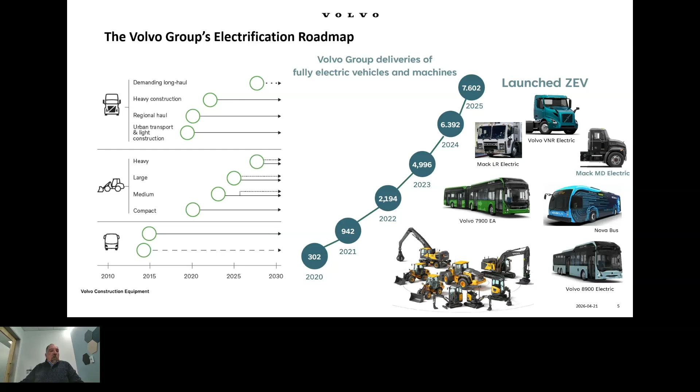So the next question is really what is driving this drive towards more sustainable solutions and more sustainable practices in our industry. I look at four different trends that are driving this forward.

So political trends definitely are part of it. They are moving us forward. What the government and the society wants us to do in terms of sustainability is usually defined through the regulations, the laws coming out of our politicians, coming out of our governments.

But there are other trends affecting this as well. We are seeing a rapid move to urbanization around the world, basically the phenomenon of people moving out of rural areas and into heavily populated areas, or cities. We are seeing a lot of movement in technology over the last few years, not only in the innovations coming out in technology, but in the pace of technology changes and adoption rapidly accelerating.

And we are also seeing a difference in the energy outlook around the world. Different types of energy are being phased out, and different types of energy generation are being brought in. But certainly the demand for energy, if you look at data warehouses and AI, is going up exponentially as we speak.

So if we take a deeper dive into these, political and social uncertainty definitely is a driver in the last few years. We're seeing right now some different tariff regimes imposed on us. We're seeing a war in the Middle East, or a conflict in the Middle East. All those things are drastically affecting our political situation and the geopolitical situation worldwide.

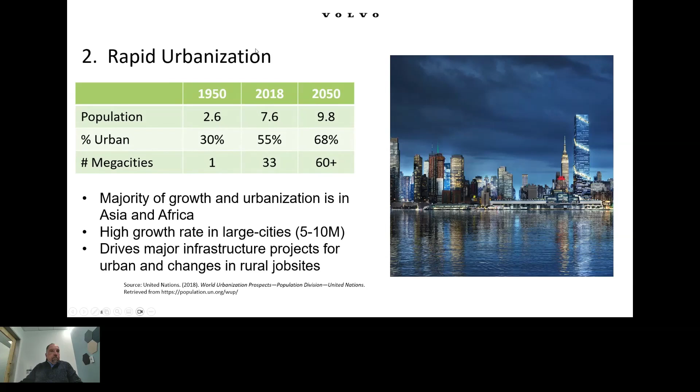Technology continues to change and advances in cyclical waves, but more rapidly as time goes on, so the pace of technology continues to accelerate. The newest technologies we're looking at are AI and data driven. We're still in the middle of the information age, and we consider these to be the next technologies that'll be dominant for the next 20 or 30 years. But we're already starting to look at what comes after that, and we don't know what that is. It could be biotechnologies, nanotechnologies, or a number of different technologies. But we're pretty sure, looking at history and technology development over time, that a new set of technologies will emerge in about 20 or 30 years and become dominant.

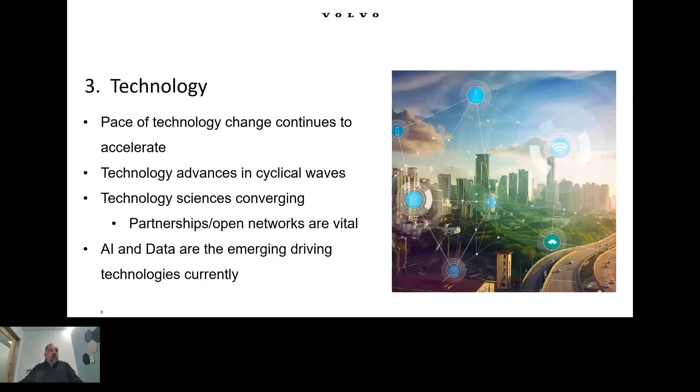So what that means essentially is energy availability and cost is a very, very good correlation to global GDP. In fact, it's the best correlation we have, better than interest rates, better than currencies, better than any other factor in economics. But it has changed over time. What happened in 1973 is we had the OPEC oil crisis, and we learned to be much more efficient with our energy usage. So for every unit of energy since the 1970s, we've been producing more GDP growth, which is good news. That's what we should be doing, getting more and more efficient over time.

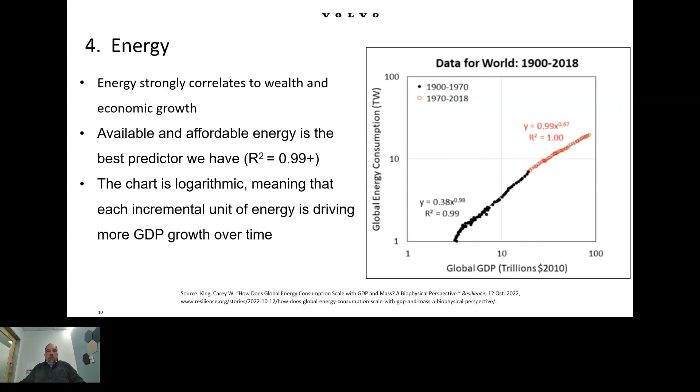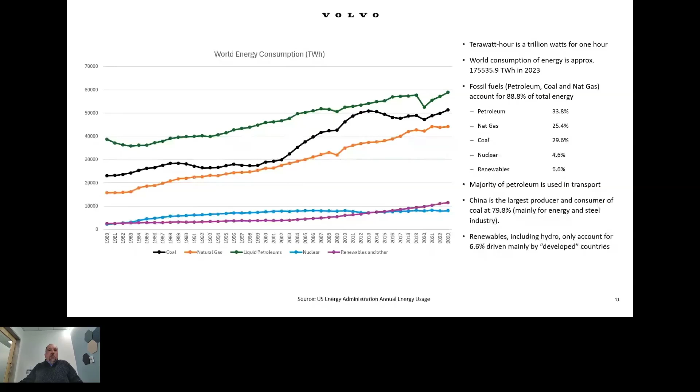The problem is that some of those nuclear plants are now coming offline, so we're actually seeing a decline in nuclear, and utilities are starting to scramble to try to bring some of them back online or replace them with new nuclear generation. Because we're at the same situation we're seeing worldwide: you cannot at the moment replace all the petroleum or fossil fuels with electricity. It's just not feasible to try to do that quickly in one step.

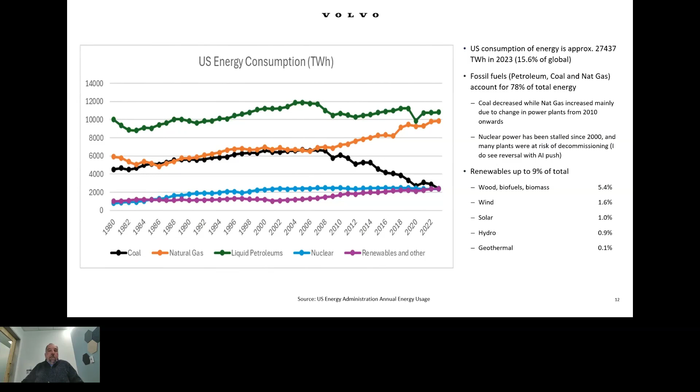Where the energy comes from does make a big difference. So if you look at a machine - bringing it right back down to the machine level - a diesel run machine with an internal combustion engine, if I wanted to generate about 5,000 kilowatt hours out of that machine, that's about enough to power an average house for about half a year. So it's a fair amount of energy.

I consume somewhere around 622 gallons of diesel. If I know that a gallon of diesel consumption produces about 10.19 kilograms of CO2 equivalents, that gives me a total of about 6,335 kilograms of CO2. That's running a machine to produce 5,000 kilowatt hours of energy or work, if you want to think about it that way.

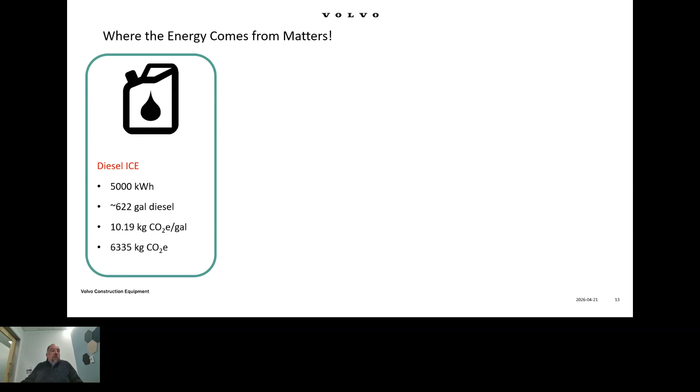That same 5,000 kilowatt hours, if I was to produce it out of hydro generation - hydro generation is not 100% clean, there is some embedded carbon in our hydro generation as well, but it's far, far less, about 99% less than burning diesel. So if I can plug in my machine and run off hydro generated electricity, I'm getting about 99% less carbon, about 55 kilograms compared to 6,335. Big step forward. But most of our electricity is not hydro generated.

As I said earlier, only 9% of our total grid is supplied by renewable sources. So there are very few people who actually have access to 100% hydro generated electricity.

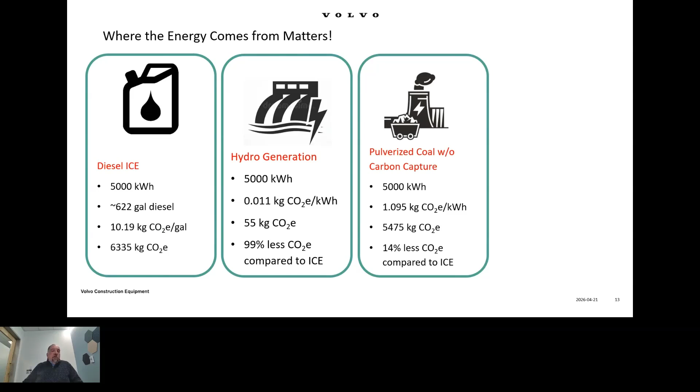So what if we look at coal? Pulverized coal without carbon capture, we're only looking at 14% less CO2 than burning diesel. So actually, if you're plugging in and taking from a coal-fired plant that doesn't have a good carbon capture system for electricity generation, you're not gaining anywhere near as much as you thought. Even though the machine may be zero emission or very low emission, the coal is producing a lot of emissions at the power plant.

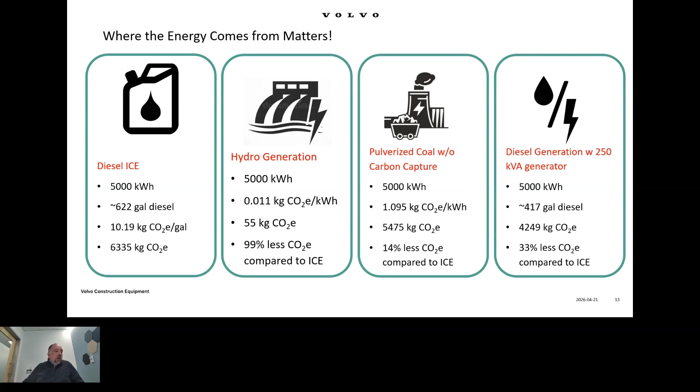And finally, I quite often get asked, okay, what if I charge my machine with a diesel generator because I don't have access to the grid? A lot of people think we're not gaining anything. The actual reality is that you're gaining about a third less CO2 than burning diesel directly in your machine. So even that is a significant step forward if you're looking at where the carbon is coming from in the carbon cycle.

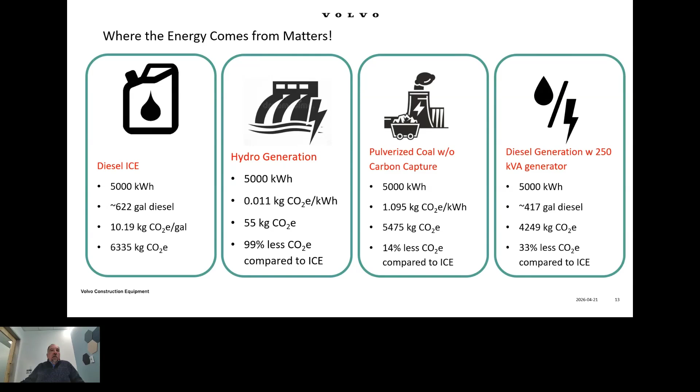So let's drill down and take a look at an example sample that we did - a real world example. But first, I want to step back and say: if we're going to look at machines and how we make a difference, it's not machine by machine. We have to look at how we get a site to be sustainable. There are two reasons for that. One is that electrifying one machine only makes a limited amount of difference versus electrifying a site with many machines on it.

And secondly, if you're going to run the infrastructure to electrify machines on a site, you don't want just one machine plugging into an infrastructure and having to run a full diesel infrastructure as well. So you want to make the transition and have as much of your site transferred over as you possibly can.

So we look at this in three steps. One, what is the machine technology that we're going to need to achieve sustainable sites? Two, what is the system that you need? In other words, how do you recharge or refuel your machines and your trucks and your conveyors and everything else running on site? And three, how do we run that whole system more energy efficient?

Because going right back to the grid, the same dynamics happen on a site. If you can get your energy consumption down, your costs, your economics are much, much better on a site.

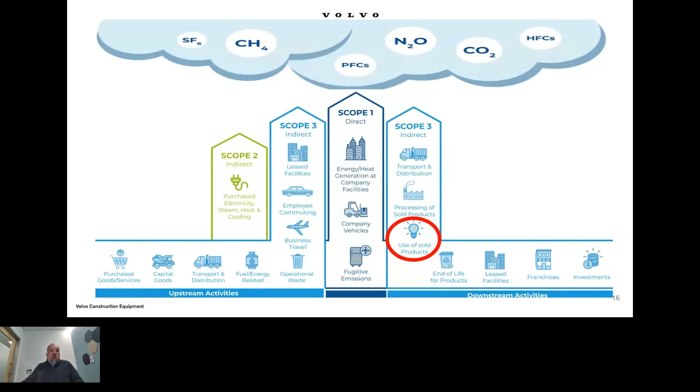So if we look at the CO2 production on a site, in our case, most of our CO2 production comes out of burning the fuel on site. If you look at our heavy equipment, an A45 for example, a 45-ton articulated hauler, 94% of the emissions come from the machine, or the carbon comes from the machine after it leaves the factory. Only 6% is embedded in the machine throughout the build process - the energy consumed in building it, all those factors are only 6%.

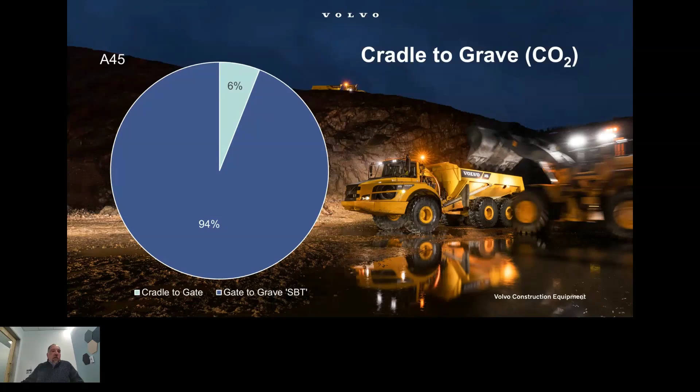So obviously, if we have a target to get 30% of the carbon out or 50% of the carbon out, whatever the individual targets are, we have to attack that 94% in the machine cases. And we do that by looking at three different technologies and bringing them together to try to make the best use of them we can.

So the technologies coming up of digitization and AI - if we understand the sites, we have good data from the sites, if we use AI wisely, we can make sites that are much more efficient from an energy point of view, from a time point of view, from a production point of view, and get those costs down and the fuel burn down and get to a less carbon intensive site.

We can also look at the sustainable power technology. So how can we power our machines to get that 94% of fuel burn down considerably and get the carbon from that eliminated? And finally, we can look at automation.

A lot of people challenge us on that and say that well, if you're automating sites, you're taking away jobs from operators. In our case, we're having a big shortage of skilled operators already. We can't get enough operators to do the work that we're asked to do. And most of these automation systems actually go into helping the operator do a better job or getting him out of dangerous situations.

So when I talk about automation, don't just automatically assume we're eliminating the operator. In most cases, it's actually helping the operator or getting him out of what we call the 3Ds - dirty, dangerous, or dull jobs - and getting machines to do them or robots to do them automatically.

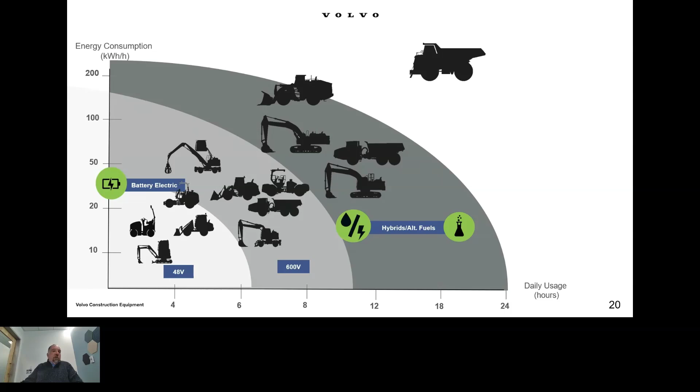If we get above about 150 kilowatt hours per hour, and we get to long duty cycles, 10, 12 hour to 24-hour duty cycles, we pretty well have to look at other solutions. Batteries become too expensive, too heavy, and too long a charge cycle for heavy equipment. So we go to hybrids or alternate fuels in those classes. For very large machines, you can do a fuel cell or alternate fuel ICE systems. In mid-size and larger machines, if the application is right, you can power them directly from the grid if it's a relatively stationary application—you plug in your machine and it operates from grid power continually.

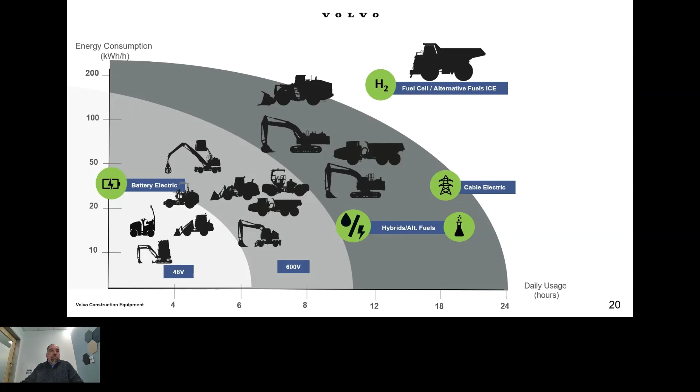So our sustainable power journey: we have 6 machines in a 48 volt range and 2 machines in 600 volt plus that are marketed in North America. These are commercially available products—we've been putting them out for a few years now and have quite a bit of experience with them. Over the next couple of years, you'll see a number of other products launched that are either battery electric, grid connected, or even fuel cell and hydrogen possibilities coming out of the Volvo Group.

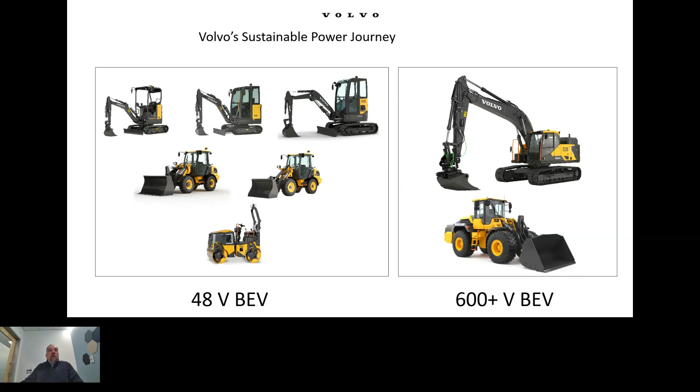So if we take a look at an actual pilot we did, I want to delve into: are we really making a difference if we electrify a machine? I quite often get challenged on different aspects of this—how much difference does it really make to put an electric machine, and is it viable economically? So we wanted to look at actual data from some of the trials we did and see what the situation really is.

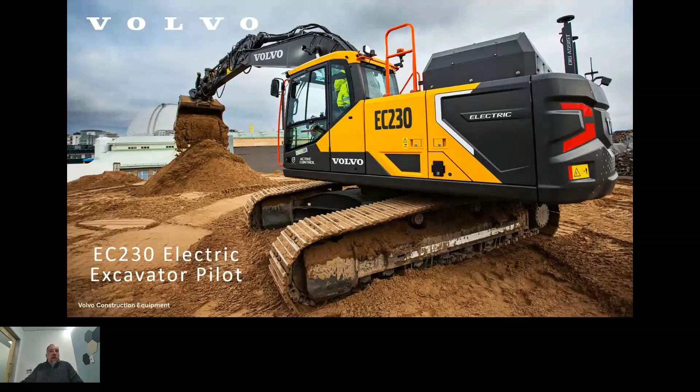So we looked at a case down in San Diego. It was a 230 electric, 20-ton excavator. The diesel equivalent to that machine burns about 4.05 gallons per hour. If you multiply that out with the CO2 produced in 122 hours, which was the trial working period, you get about 5,000 kilograms of CO2 produced.

With the electric 230, same job, same amount of time, we consumed 4,536 kilowatt hours of electricity. The grid in that particular area of San Diego had 218 grams of CO2 per kilowatt hour, which gave us 989 kilograms of CO2 equivalent—about an 80% reduction in CO2 running the electric machine instead of the diesel machine.

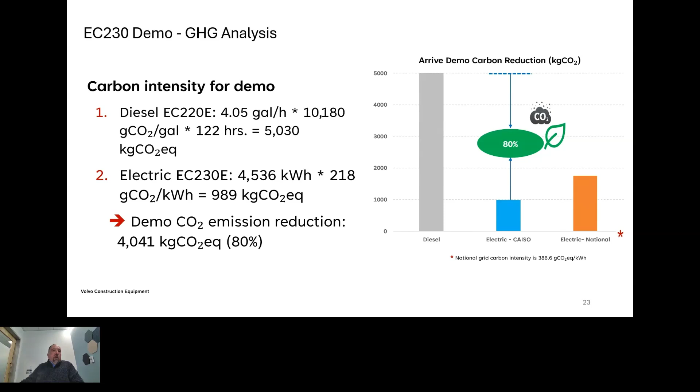Now, for most of you, 4,000 kilograms is really hard to picture, hard to see what that is. So to put it in perspective, running one electric machine, a 20-ton excavator, is the equivalent of about 13 passenger cars. So if you ran one machine for a year, you take about 13 cars off the road that are burning gas or diesel.

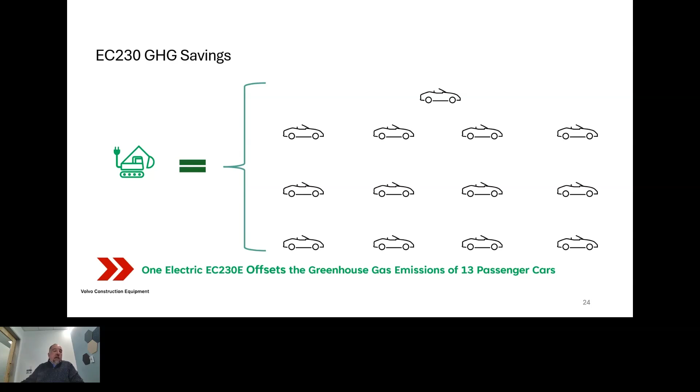One objection I quite often get is: yes, but an electric machine is much more carbon intensive—you have a lot more embedded carbon when you build it. Absolutely true. To build a diesel machine, I'm embedding about 84,000 kilograms of CO2 per machine, mainly in the steel that goes into it. Steel is a very carbon intensive process, the way we do it today. So we end up with about 84,000 kilograms.

With an electric machine, because of the batteries, that jumps up to 108,000 kilograms, which is a 28% increase. So the critics who say we're embedding more carbon—absolutely true. We're not going to deny that or argue around it. We are embedding more carbon in an electric build.

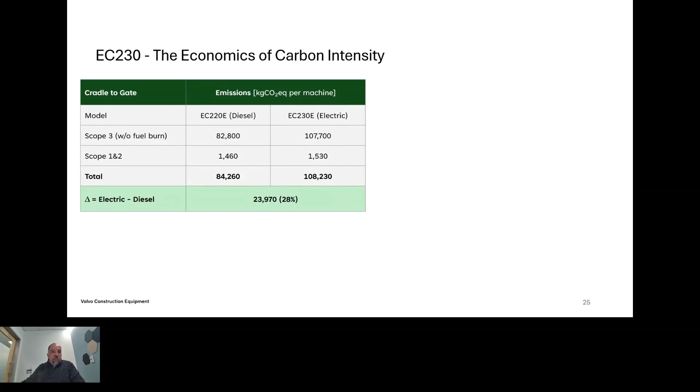However, when you start using the electric machine, because of the fuel savings, you offset that 28%, almost 24,000 kilograms, in about 800 hours of use. By the time you get to about 4,000 to 4,400 hours of operation, you've offset the entire difference in embedded carbon for the machine. So if you were to buy an electric machine and park it without using it, you've actually done harm, because we've embedded more carbon than you saved. But the minute you start using that machine, and as the hours add up, you're making a significant difference going forward.

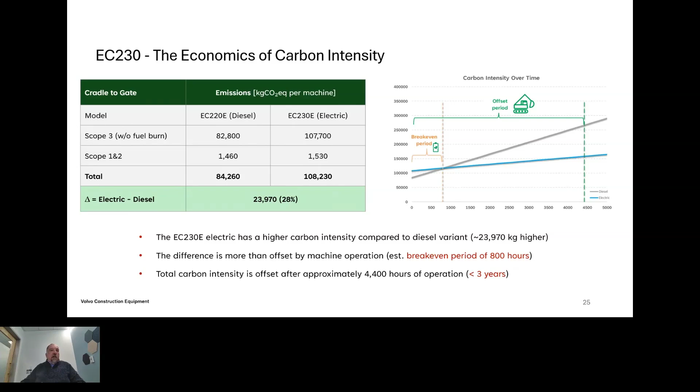So then the next question is, what are the economics of this equation? Not just the carbon, what are the economics? Take the same trial again, diesel twin, we burn 4.05 gallons an hour. And in this case, we were paying about $5.29 per gallon of diesel delivered to site, because most of our work sites are remote, as this one was. So we have to get fuel brought in. So the price, in today's dollars, that's a pretty comparable price.

But even at the time, diesel was running about $4.25, I think, and there was about $1 surcharge to bring it in delivered on site that the contractor had to pay for.

Comparatively, the electricity, the kilowatts he used, was about 10.49 cents a kilowatt hour if he charged in off-peak hours. If he charged in peak hours in this particular area, it was about 400% more, so about 45 cents a kilowatt hour. So that peak charging makes a big difference, and that's part of the site plan I was talking about.

But what it ended up is, if you look at the fuel savings, he saved about 82% of the cost in fuel savings. And these are the actual numbers from that 122-hour trial that the contractor ran on site.

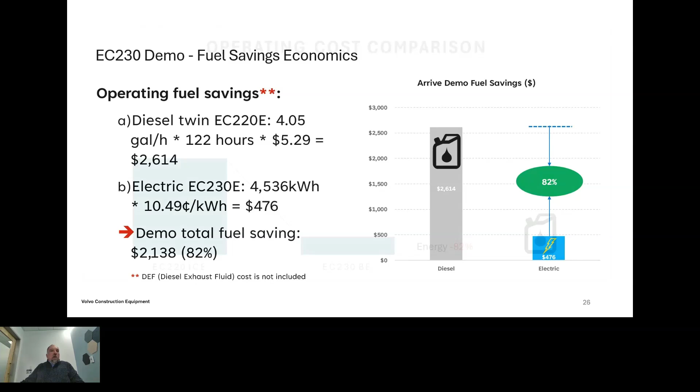So one of the questions is, what about the other costs that go into operating an electric machine compared to a diesel? It's fine if you've got 82% energy cost savings in this case. We estimate that repair and maintenance, because there's less moving components in electric, will be about 35% less than a diesel machine.

But some of my critics say, wait a minute, batteries don't last as long as we're saying a diesel engine might. So what if your battery degrades, so that after 12,000 hours or after a period of time, you have to replace the battery?

So we said, okay, let's replace the entire battery at 12,000 hours, which is a very conservative adjustment. We think the batteries will last more like 18,000 hours before they have to be replaced, and there's a second life on those batteries. So it's not like a fuel tank where when you pull it out, you throw it away, it's just sheet metal. The batteries will have a second life application and a value even when you replace them.

But even if you take the full replacement with no recovery, you're still about 6% ahead in repair and maintenance with the electric machine. And then you have 100% recovery of your DEF costs, because electric machines obviously don't need diesel exhaust fluids.

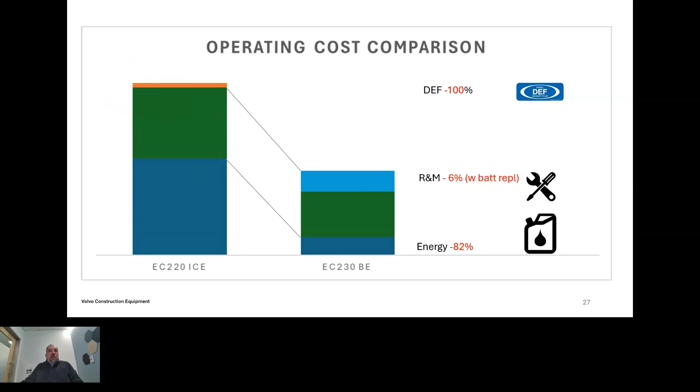So if you take this and plot it over the life of the machine, I've plotted a 220 ICE machine, or internal combustion diesel machine, with the assumptions down the side. This was based on that use case we did: fuel at $5.29, electricity at 10.49 cents, interest at 8% on the money he had to borrow. And the price of the electric, we said at this time, was about 1.7 times diesel. We said 2,000 hours a year of working, and this included the maintenance and the DEF. So that would be his cash flow over the life, or over the first 20,000 hours use of the machine.

So if you plot the electric compared to that, you see that by the end of the 20,000 hours, he's caught up and surpassed the savings of the ICE machine, and he's spent about 15% less cash to run an electric machine over a diesel.

The other very interesting thing was even with the price of an electric at 1.7 times, you see that there's really no penalty in the first few years while he's paying off that financing. He's got a higher finance charge, but he's burning less fuel, and the two pretty well offset each other.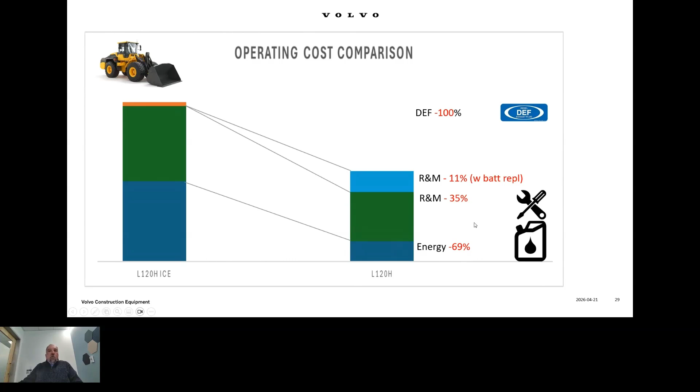So instead of 80% energy savings, you save about 69%. In other words, it burns less fuel than the excavator would. The repair and maintenance, we assume to save 35% baseline. If we had a complete battery replacement at 12,000 hours, you save about 11% instead of 6% on the excavator. And the DEF, of course, you save 100% of, which gives you curves for a loader that look similar to the excavator, a little less savings over time because you're getting less fuel savings.

But still, if you have an incentive to buy it of 20%, or if the price comes in more comparable, you're still saving 20% over the life of the machine, which is a pretty significant number if you operate these machines.

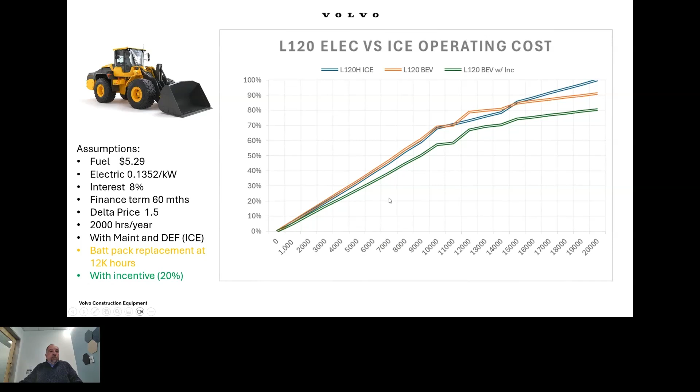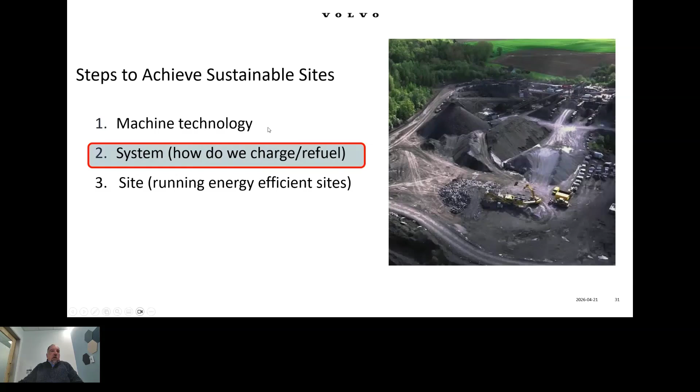So the next question people ask is, okay, if we're putting in these electric machines, we're converting our site as much as possible to electric, we're trying to gain all those systems, all those savings, how do we recharge or refuel these new machines? So we look at it in terms of 3 ways to do off-road charging.

So if you happen to be lucky enough to be at a site with grid access, that's obviously the easiest. There are grid-connected chargers available, available from a number of different sources. The same chargers you use to charge your EV cars, Ford Lightnings, or any other machines are applicable, and they are readily available and easy to wire up on your site.

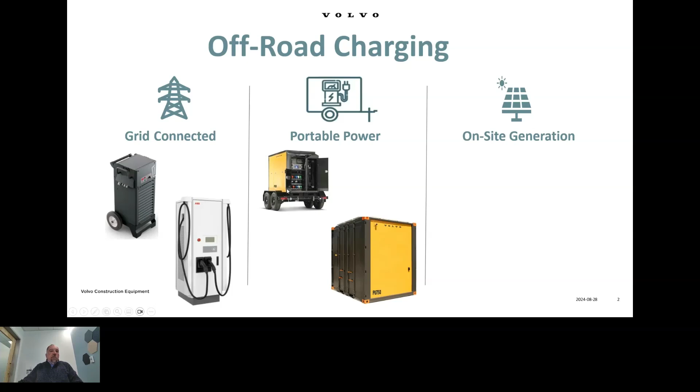If you don't have a grid run to your site, we all know that running the grid to a remote site can cost millions of dollars in line charges and setup charges. So if you're in a situation like that, you may not have a choice but to go with portable power, to take electricity from a grid connection to the machine and recharge that way. We, as well as a number of other companies, are working on portable battery packs or portable charge systems that can be taken out to a machine and recharge them.

And remember, as I said, even if you go to on-site generation with a diesel generator, you're still saving 30% of the carbon, and it's still much more economical to recharge an electric machine that way than if you were running a straight diesel machine.

But there are other on-site generation methods that we are offering through partners to our customers as well. So you can do solar or wind generation. Some sites have hydropower available at industrial plants or industrial mine sites, or you can even do bio-generation. You consume biomass and generate electricity from that, which is a viable method that we've proven out.

This loader that you see in the picture ran totally off the heat converted to electricity that was being generated from getting rid of the waste biomass they would have otherwise had to truck away, mulch, and produce carbon through that operation.

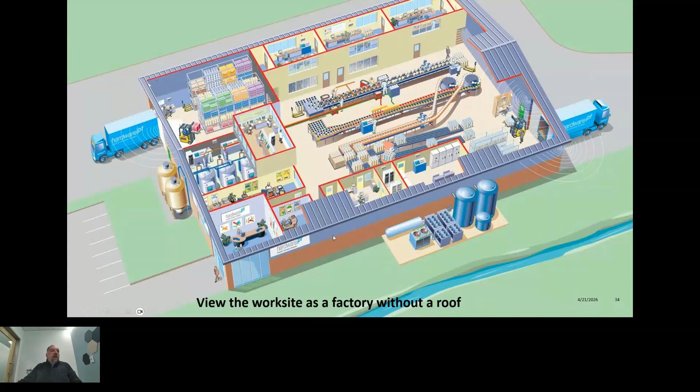So the third part, and the last part of my presentation, is: okay, what do we need to do to run an energy-efficient site? Our view here is we need to start looking at these remote job sites not as a number of tasks or jobs to be done, but as a factory without a roof. So we need to look at the same analysis that we do in every one of our factories and production facilities, and bring that to an off-road site. So the first step is to basically create your digital twin.

We have the telematics on the machines, we have the AI systems, we have the tracking systems. We can set up each one of these machines with what are the transport, where are you digging up material, where are you depositing material, what are you doing with it, what are the value-added steps, what are the hazards and the bottlenecks. All the same considerations we have with a factory, we can do on our sites now very easily. And then with the telematics and the AI, we can optimize those material flows and the energy flows throughout the site.

So this is a science that's starting to develop. Volvo and a number of other companies are putting out systems that can help you manage these sites with a view towards sustainability efficiency, but also production efficiency and energy flows and energy efficiency as well. And if you do that...

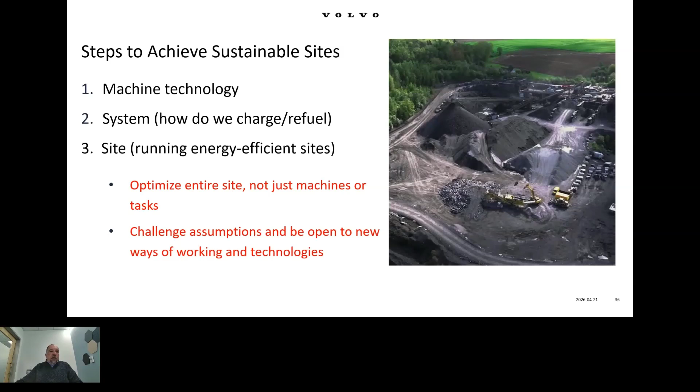You end up with a thinking that you're going to optimize the entire site, not just the machines or tasks that are on the site individually, but you also end up challenging the assumptions and you're opening yourself up to new ways of working completely. So, in other words, should we be using a conveyor belt electrically run instead of a loader moving materials? When you're looking at the site dimension, you can do that analysis very easily and come up with the right answer for your particular site, the right customized site design to run your site as efficiently and productively as possible. So with that, I will end.

I like this quote. It came from Franklin D. Roosevelt, the 32nd U.S. president, actually our longest serving president. And one of the interesting things about this quote, it was for a Jefferson Day speech that he was to give April 13th. Unfortunately, it was never given because he passed away April 12th, the day before. But in his speech, he was going to say, the only limit to our realization of tomorrow will be our doubts of today. And I think that's a very good quote, a very good thing to keep in mind.

We have the technology, we have the energy, we have everything we need to realize this future we're envisioning for tomorrow. We just need to put aside our doubts and get to work in doing it and building these systems and building these sites that are more efficient, one step at a time, that will take us to where we want to be tomorrow. So in other words, as I started out, to build the world we want to live in for tomorrow. So with that, I'll turn it over and answer any questions that you might have. Thank you very much for your attention.